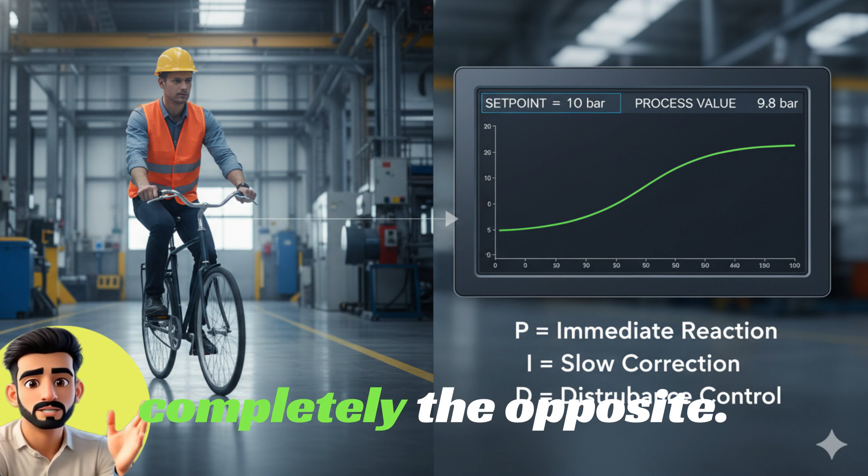Friends, as soon as people hear the name PID, they get scared. It seems like a very complex mathematical formula, which only software engineers or high level programmers can understand. But the reality is completely the opposite. PID is a natural thing, a behavior that we follow in our daily life without thinking.

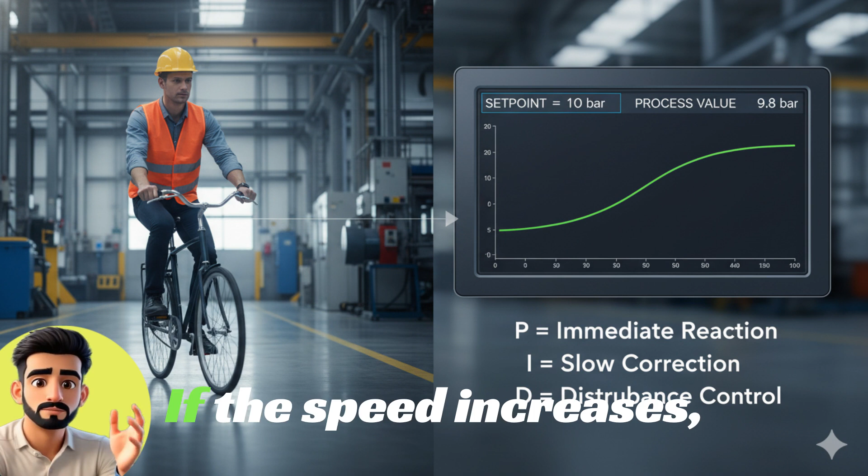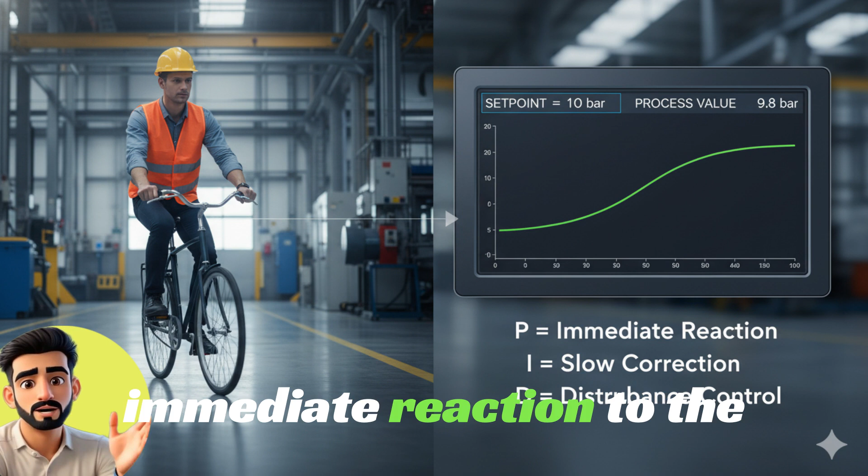Think you are riding a bicycle. If the bicycle tilts slightly to the left, you automatically lean to the right. If the speed drops, you pedal faster. If the speed increases, you slow down the pedal. These simple reactions are the foundation of PID. Proportional means giving an immediate reaction to the system. You see an error and immediately make a correction.

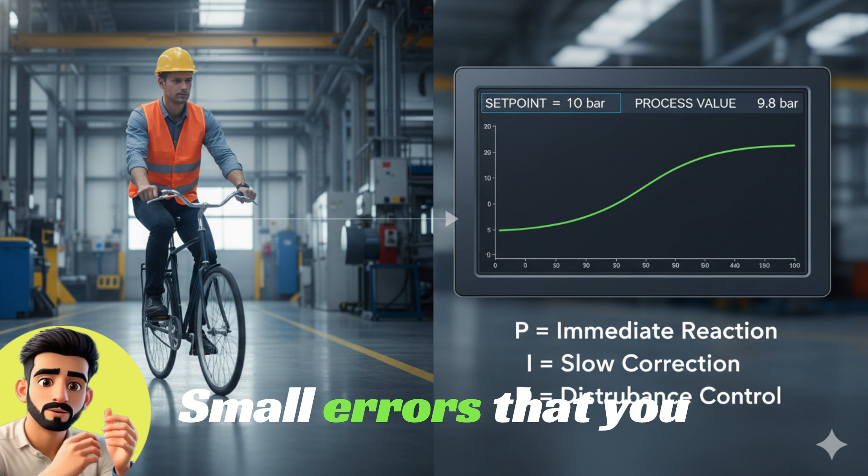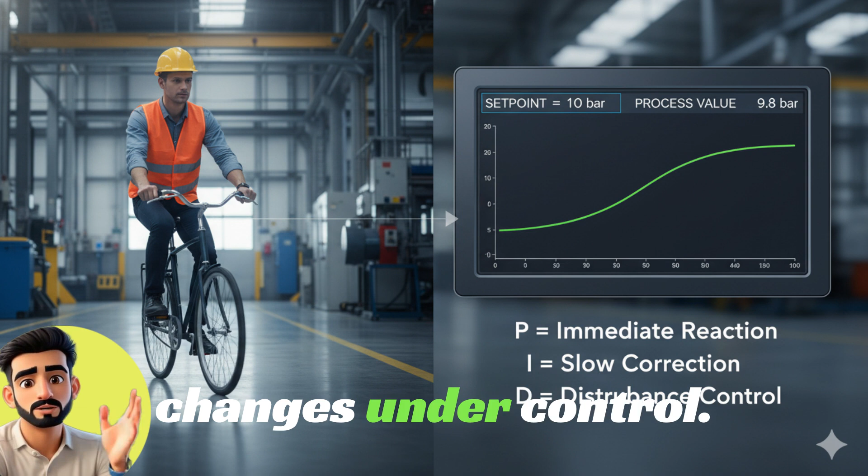Integral means gradually eliminating small mistakes, small errors that you don't notice. The integral keeps fixing them over time until the process settles cleanly. Derivative means keeping sudden changes under control. Just like when a quick jerk comes to the handle of a cycle, you smoothly absorb that jolt and keep the balance stable.

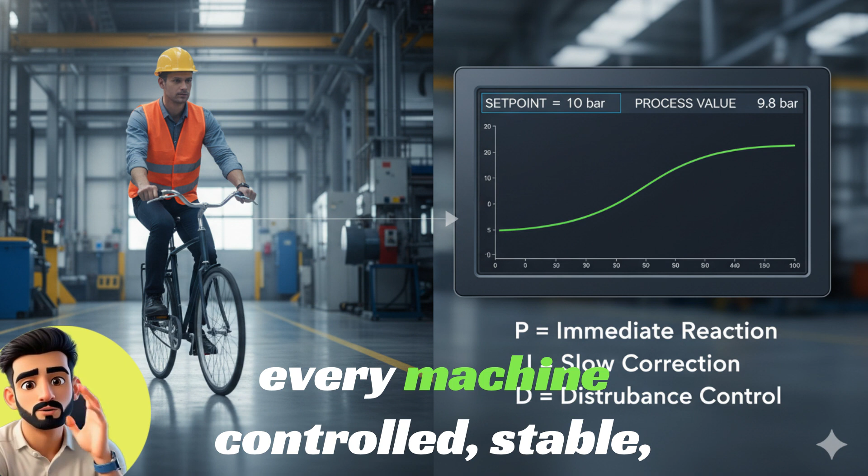These three actions, proportional, integral, and derivative, together make the motor, pump, fan, and every machine controlled, stable, and reliable. In this episode, we will make these three concepts so simple that after hearing them once, you will never forget them in life.

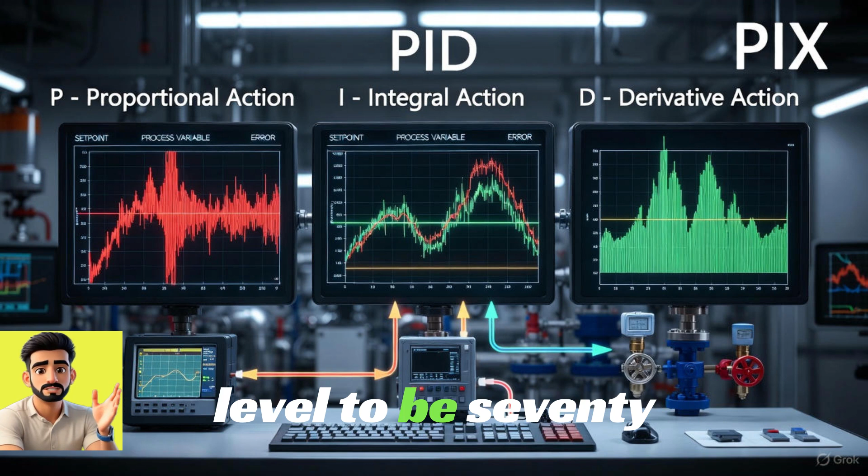The simplest, most straightforward, and fundamental principle to understand PID is every industrial system has a set point. Sometimes we want the pressure to be 10 bar, sometimes the tank level to be 70%, sometimes the flow to be 200 cubic meters per hour. This is our target. Now, the actual reading of the system, which we call the process variable, is never perfect. Sometimes it is a little less, sometimes a little more, sometimes it remains stable, sometimes it gets disturbed.

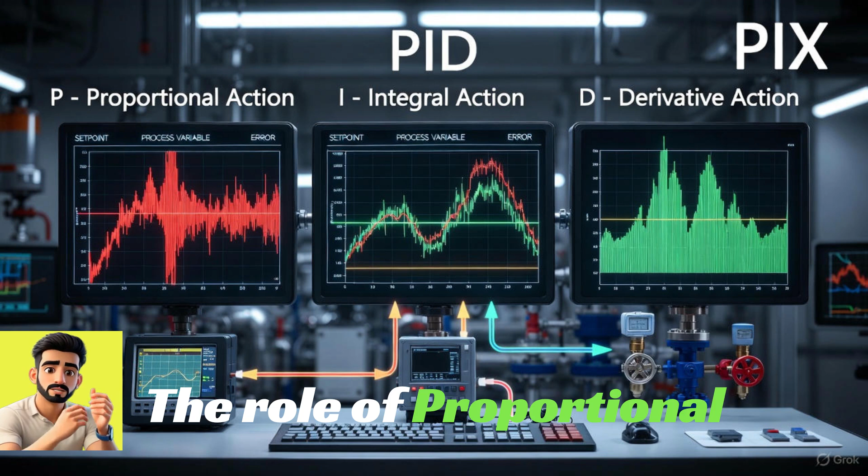The difference between these two is called the error, and the entire philosophy of PID revolves around just one thing: to bring the error to zero. That's it. The role of proportional is to look at the error and respond immediately. Fast response, quick correction. The role of integral is to slowly eliminate small continuous errors, errors that are not visible. By integrating over time, continuously push the system gently until the process settles exactly at the target.

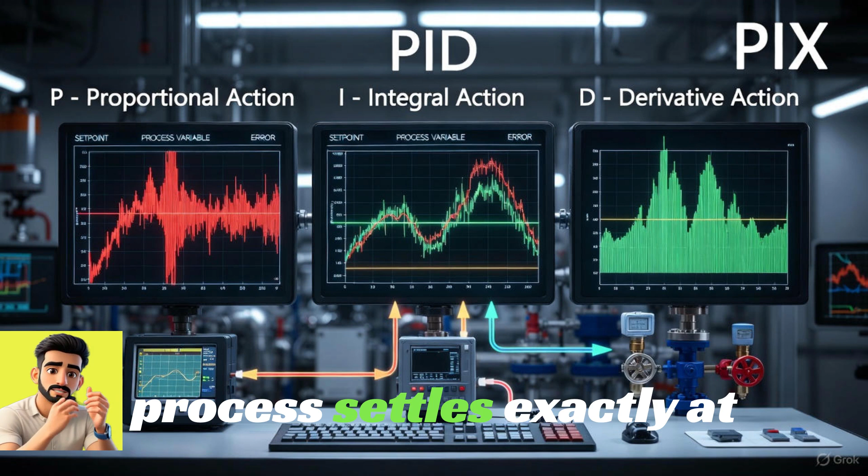The role of derivative is smoothing sudden changes. If any disturbance occurs, there is a quick jump in the pipeline, or the load changes suddenly, the derivative calms the system down and prevents unnecessary rapid changes. If you understand these three roles, proportional fast correction, integral steady correction, and derivative smooth correction, then understanding PID becomes incredibly easy. This is the very foundation upon which the entire industrial tuning is built.

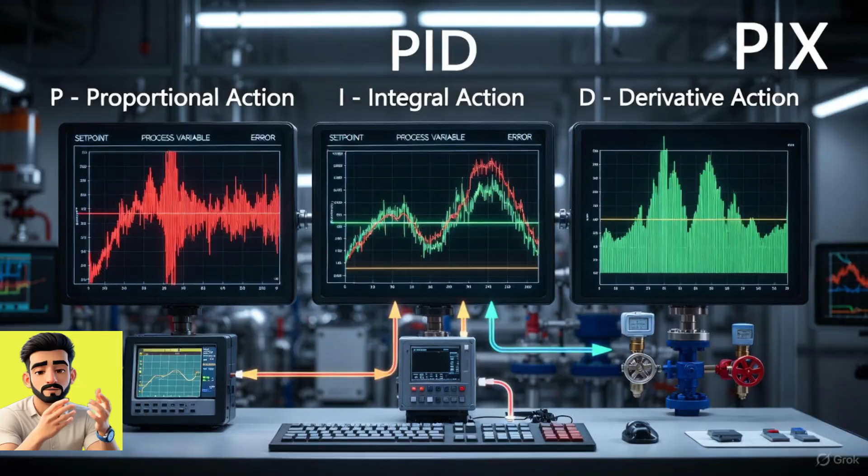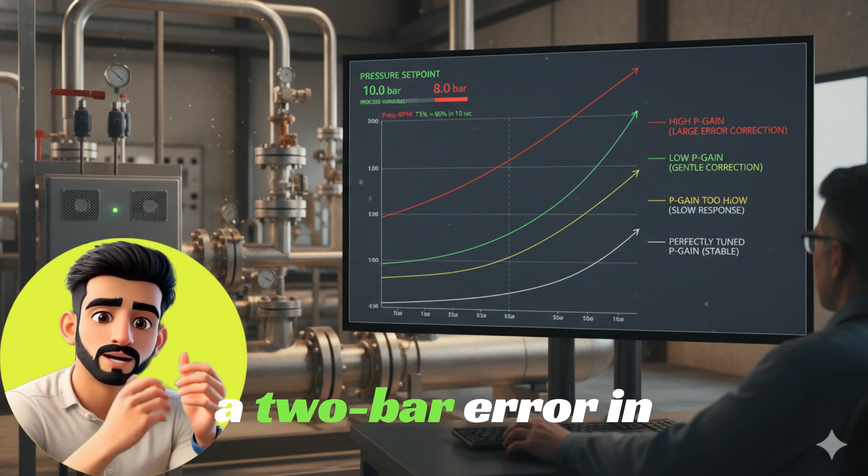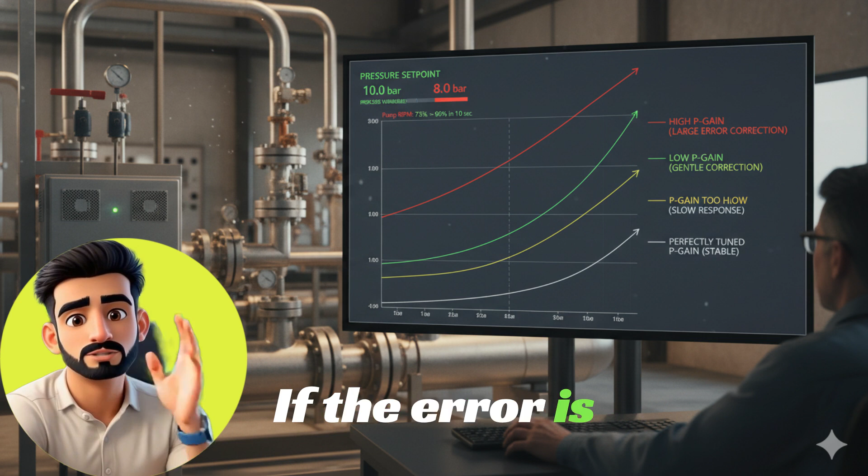Now let's talk about proportional gain, which is the heart of PID. The system's core reaction starts from here. Imagine your pump pressure should be at 10 bar, but currently it's only at 8 bar. That means there is a 2 bar error in the system. Proportional gain gives the system a signal that the larger the error, the stronger the correction needed. If the error is small, the correction remains gentle.

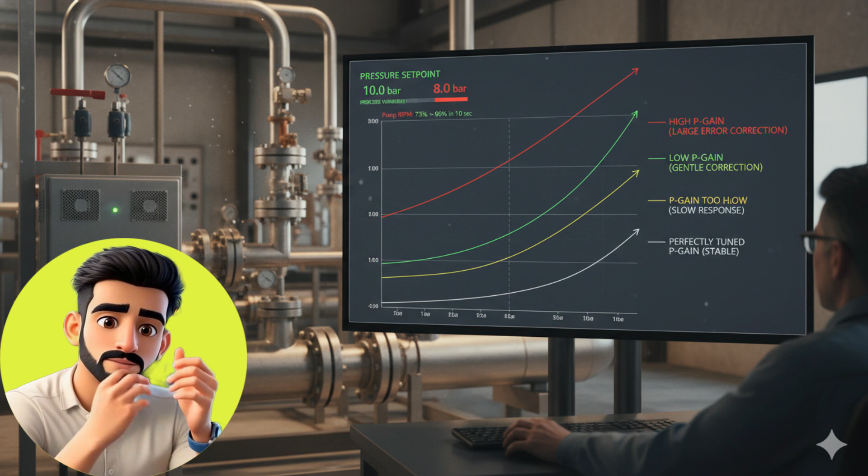If the error is large, it pushes the drive motor more to quickly bring the process close to the set point. P gain makes the system fast. The machine feels responsive. The operator thinks the process is reacting smartly. However, proportional gain is a double-sided tool.

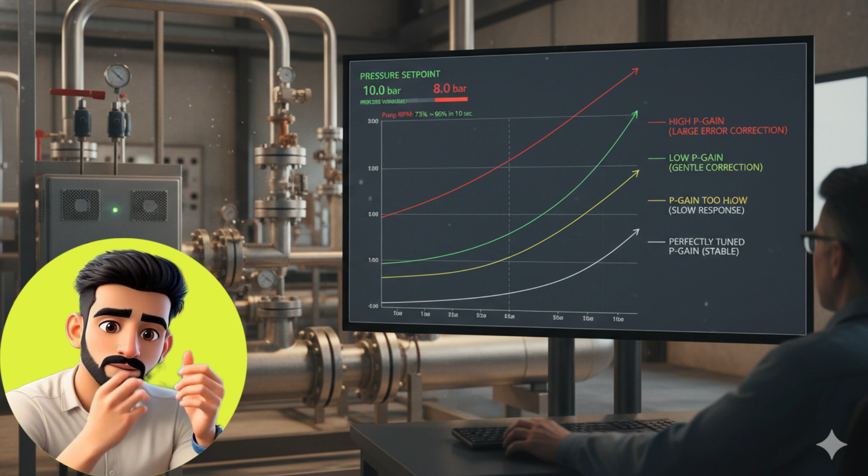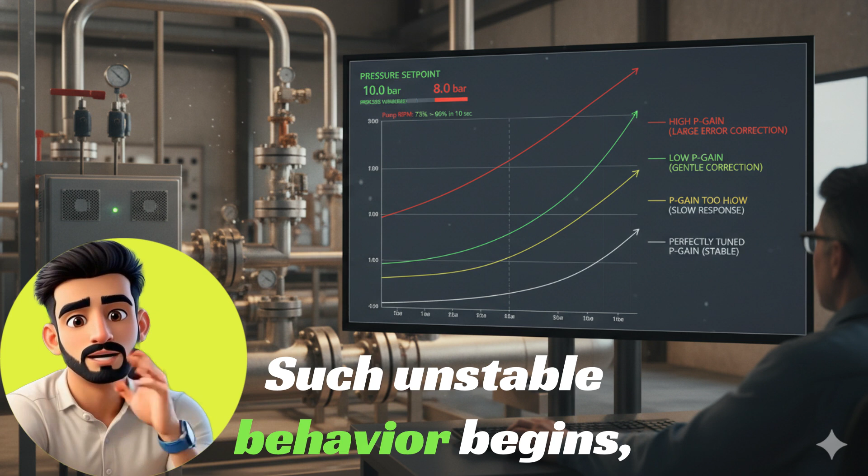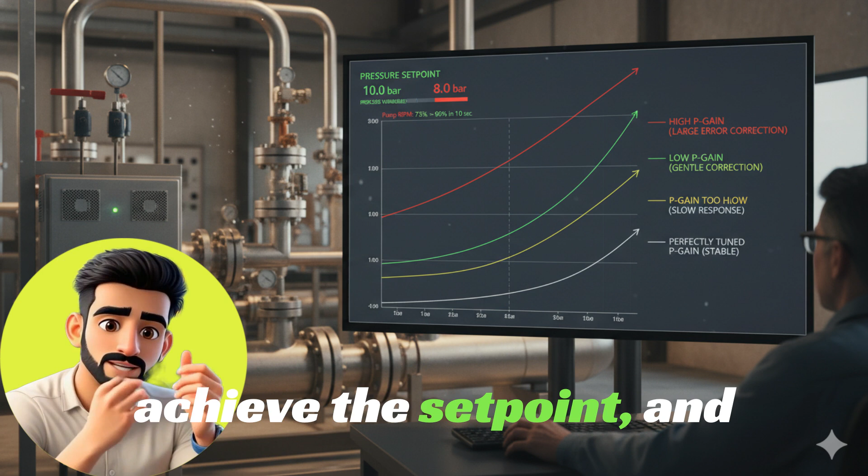If P is too high, the system goes into continuous oscillation. The pump fluctuates slightly up and down, like 9.8, then 10.2, then 9.9. Such unstable behavior begins, which is risky for the plant. If P is too low, the system becomes lazy. Response becomes slow. It takes time to achieve the set point, and the plant feels sluggish.

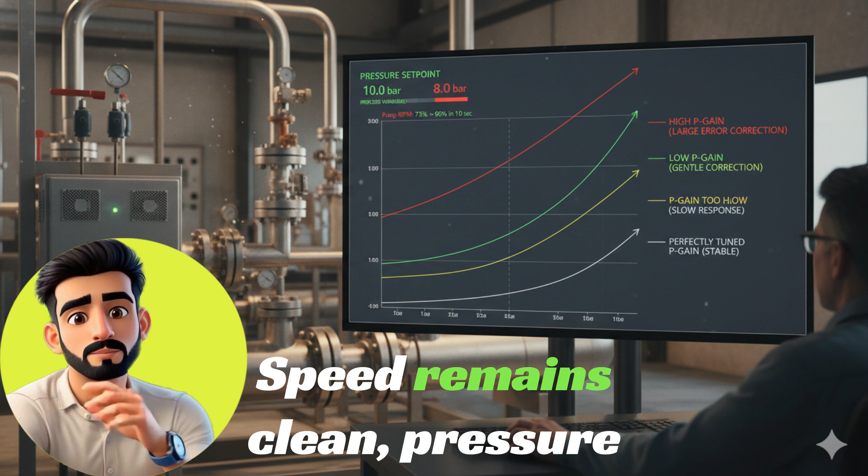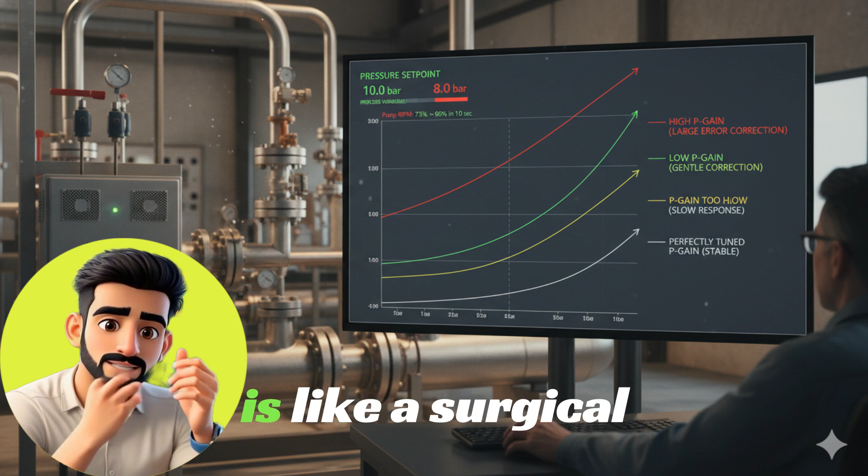But when the proportional gain is properly tuned, the system starts running butter smooth. Speed remains clean, pressure stays stable, and the overall performance of the machine gives a professional grade feel. That's why proportional gain is like a surgical tool in the engineer's hand.

The precision with which you tune P determines the stability of the entire process.

Integral gain is the most misunderstood part of PID. People often think that integral is unnecessary or that the system will work fine without integral, but the truth is something else. Proportional action alone can never eliminate steady state error. You may reach the set point, but you won't be able to stay there. The system will drift up and down, just keep fluctuating.

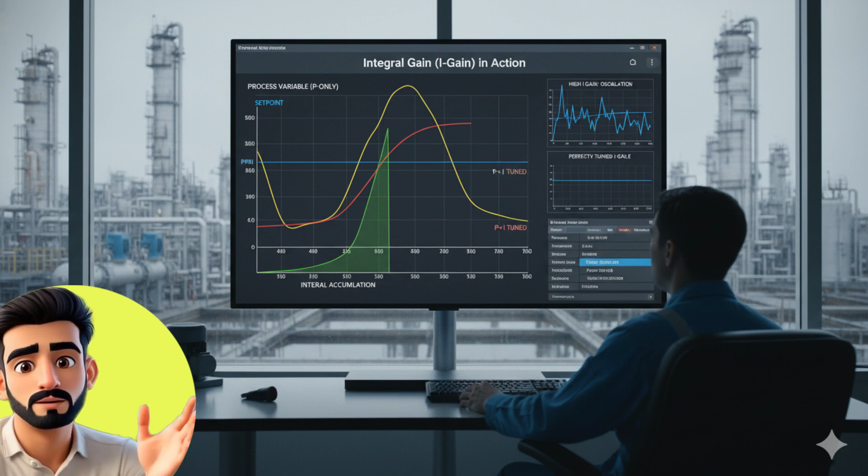This is where integral shows its real magic. Integral collects the error over time and gradually provides correction. Just like a person solves a problem with patience, slow, steady, thoughtful. If the system is even slightly below the set point or slightly above, the integral notices that small error. It accumulates that error and gently pushes the system until the process settles exactly at the target.

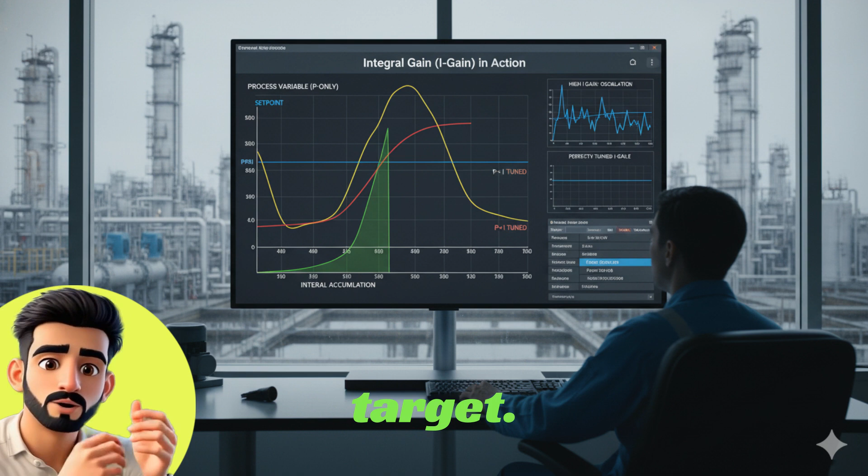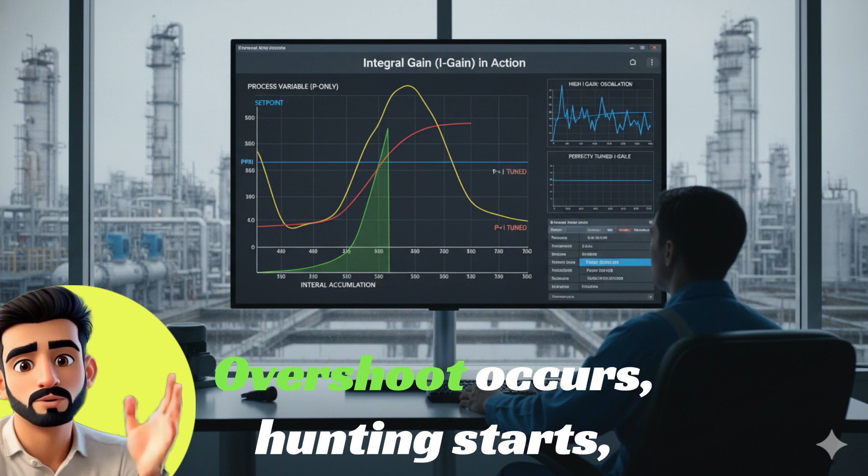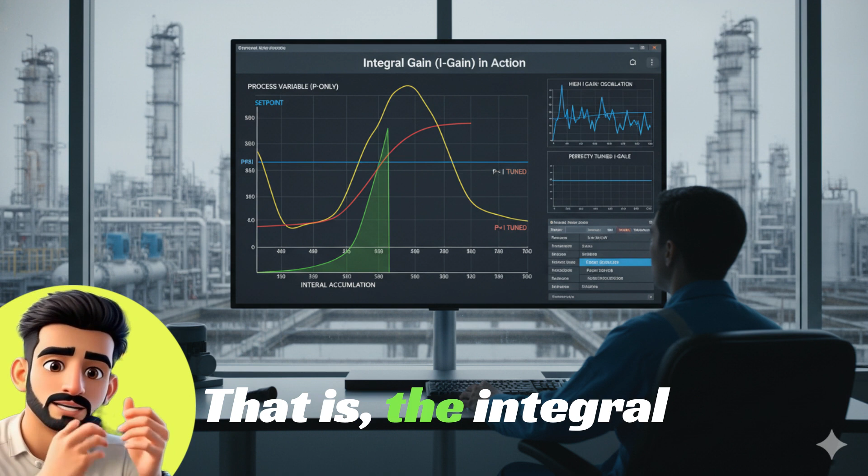But integral also has a dark side. If the integral gain becomes too high, the system becomes heavily unstable. Overshoot occurs, hunting starts, surges happen in pressure lines, and the machine begins to behave jumpily. That is, the integral gain is both very useful and dangerous. Proper tuning is the real magic that unlocks this. When the I gain is balanced, the system's behavior becomes smooth, steady, and industry-grade stable.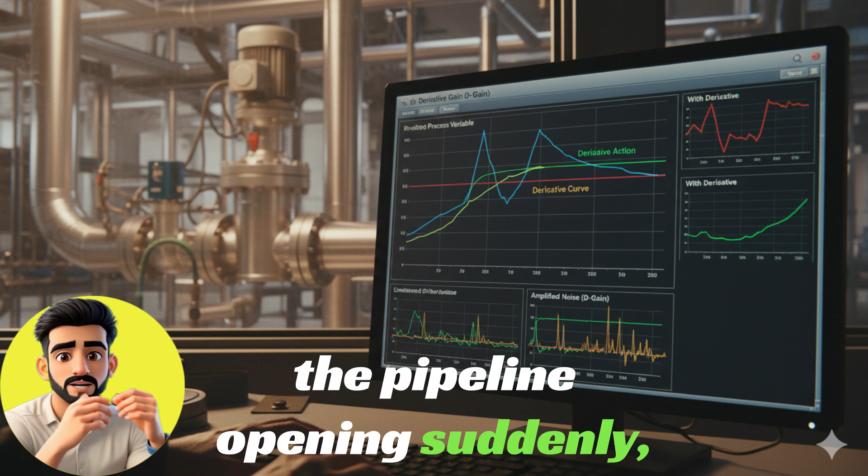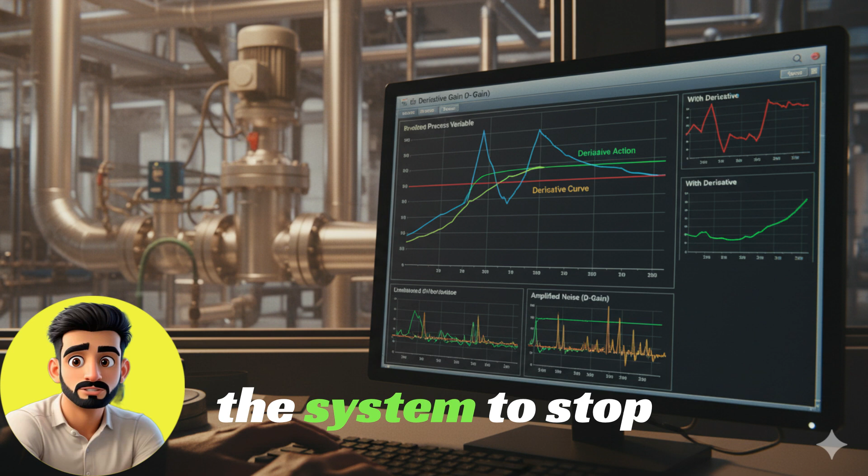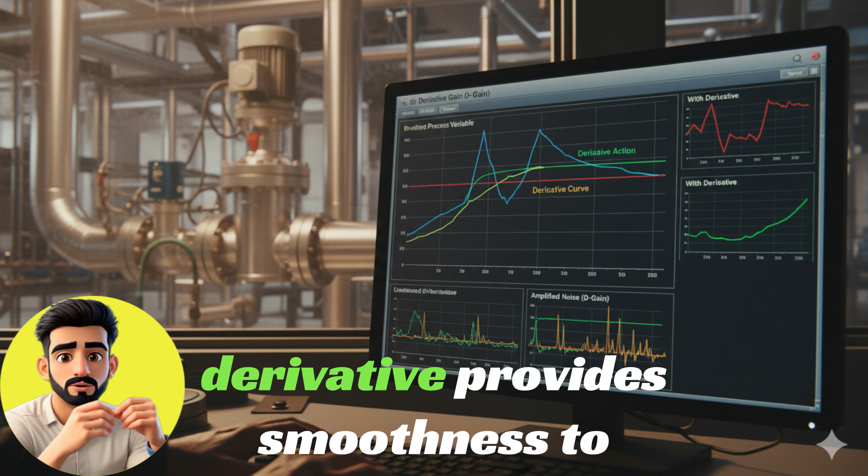Derivative gain. In PID it is the shock absorber of the system. When the system receives any sudden disturbance, such as a valve in the pipeline opening suddenly or inflow into the tank increasing abruptly, the derivative reacts first. D-gain detects that sudden change and tells the system, "Stop, do not react so quickly, understand the situation first." In other words, the derivative provides smoothness to the system, calms down its impulsive response, and keeps sudden jumps under control.

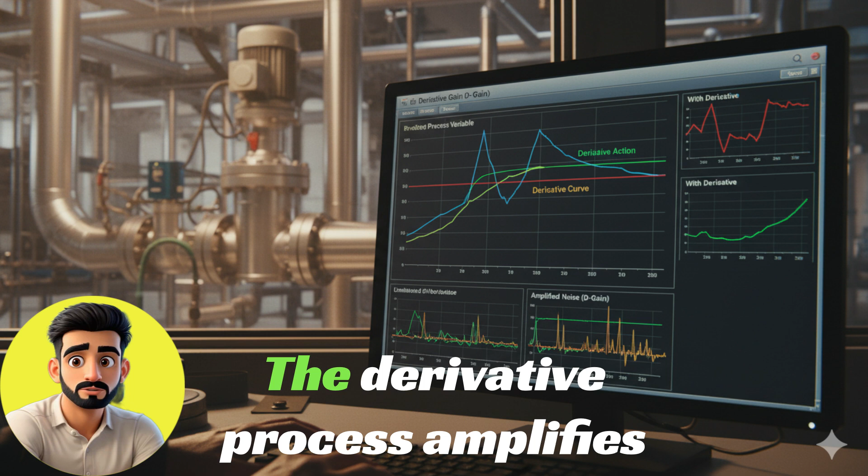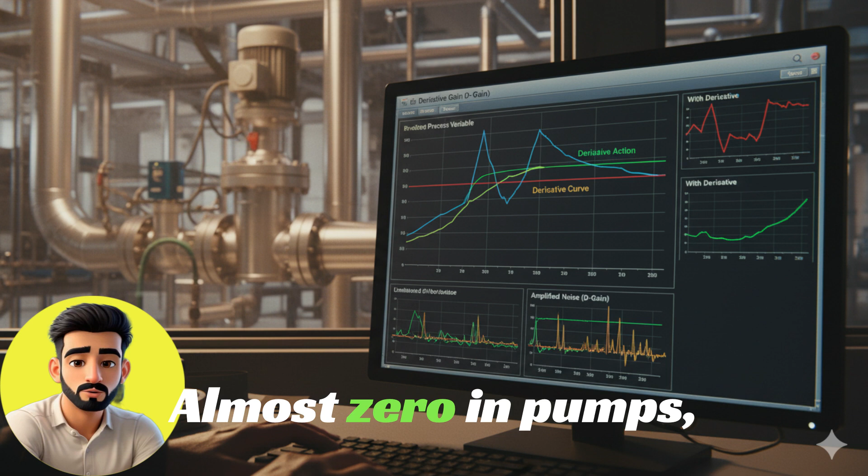But D has a major limitation. The derivative process amplifies noise. If there is sensor noise, pipeline vibration, or the signal is not clean, then D amplifies these small movements. The system can become unnecessarily jumpy. That is why in industry, the use of the derivative is very limited. Almost zero in pumps, almost zero in fans, and completely zero in level control. In these processes, D creates more problems and provides fewer benefits.

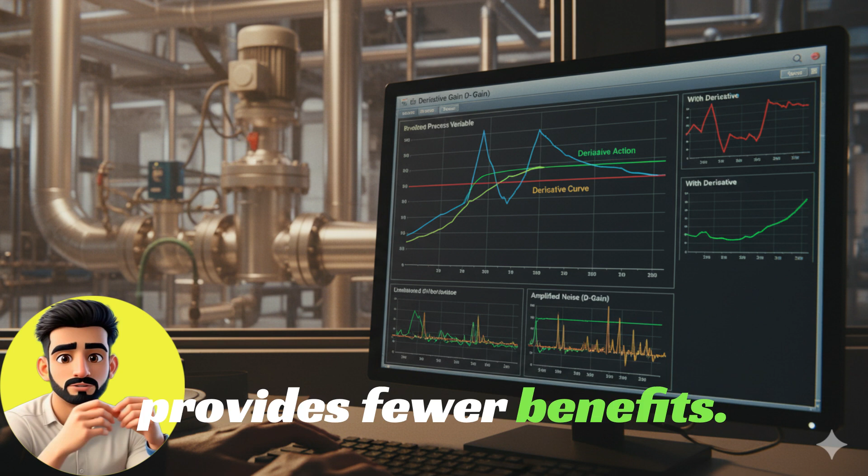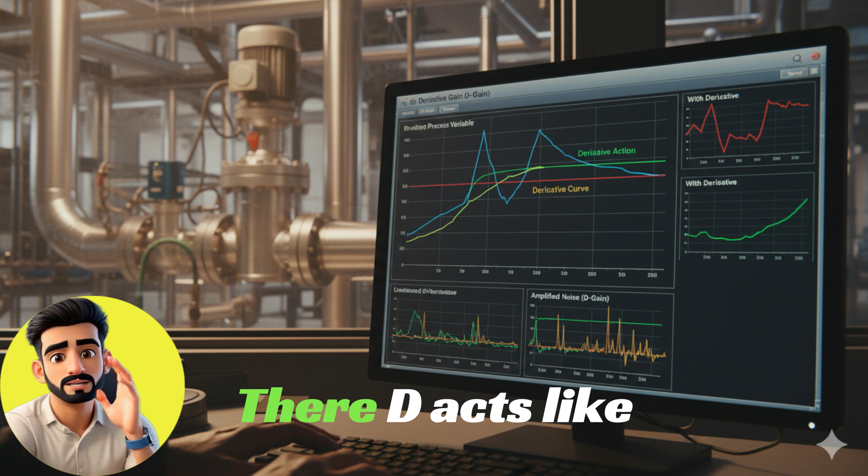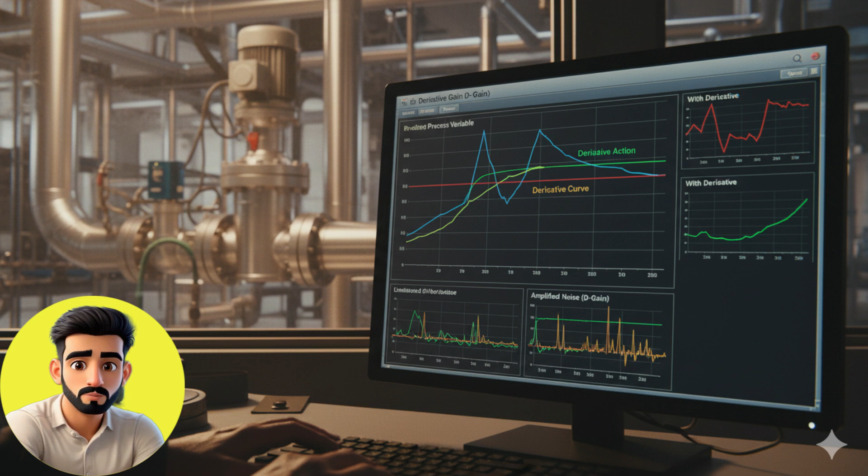But where precision matters, such as high accuracy speed control, position control, robotics, pick-and-place systems, CNC machines, there, the derivative is very valuable. There, D acts like a strong stabilizer, polishes sharp responses, and makes motion ultra-smooth. Understanding the derivative is an important milestone in PID tuning. Where to use it, where to avoid it. This difference creates a gap between a normal tuning engineer and a control systems expert.

The control structure inside VSD is completely layered. This design is not the result of an accident, but the outcome of decades of research and industrial experience. At the very inside is the torque loop. This is the fastest loop of the system. The torque loop reacts in microseconds. It instantly adjusts the motor's current and ensures that the motor receives the required torque without any delay. Such a level of control is so fast that the human eye can never notice.

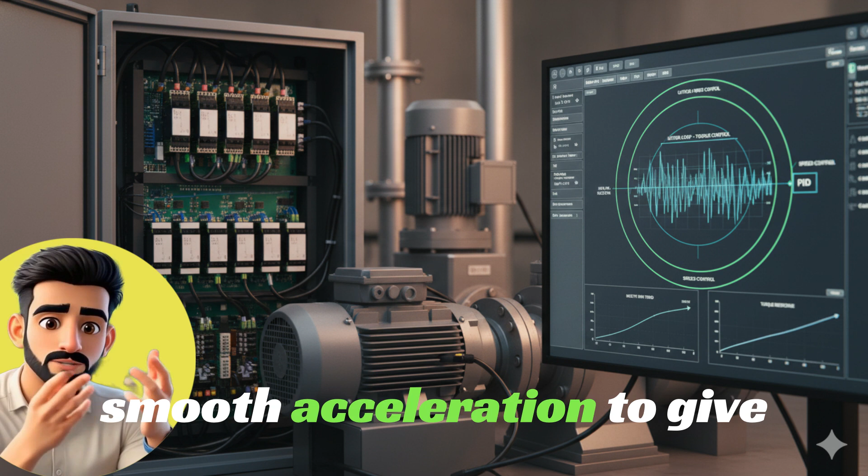Above this torque loop is the speed loop. The speed loop is relatively slow, but it is the actual decision maker of the system. It decides how fast the motor should run, how much torque to demand when the load increases, and how much smooth acceleration to give to the machine. The PID controller mostly works in the speed loop. It creates a balance between speed and torque so that the machine is neither jumpy nor feels sluggish.

The real beauty of this layered design is that the system is both highly responsive and highly stable. The torque loop provides instant reaction. The speed loop offers smooth correction, and together they give the machine a professional industrial grade behavior. If you understand this concept, the torque loop is inside, the speed loop is outside, then you have understood the true core of industrial motor control. This is the foundation upon which all modern drives are based.

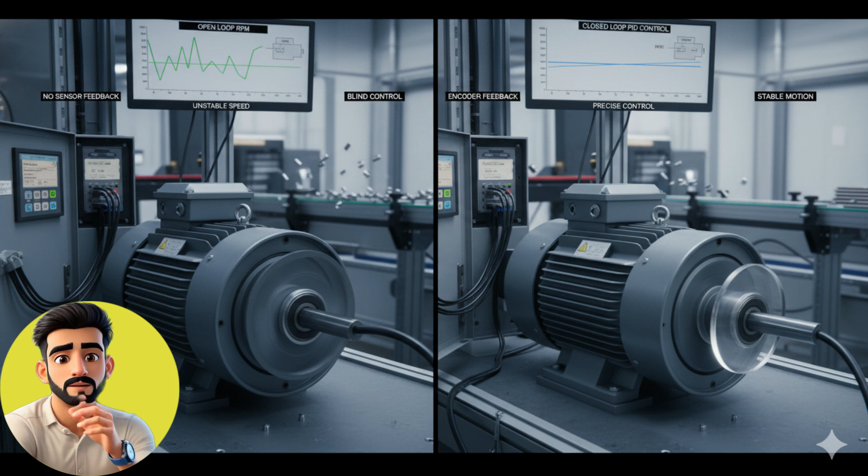Imagine you are driving a car, but there is no dashboard. You don't know the speed, you have no idea of acceleration, and you are just driving by feel. This is open loop control. The system is running, but without any real feedback. Now imagine you have a complete dashboard. There is a speedometer, an odometer, and cruise control is also active. You can maintain the car's speed exactly. If the road slope changes, if the load changes, the car still continues to run smoothly because the system knows in real time what the speed is and how much correction to give.

This is closed loop PID with encoder. The encoder continuously provides feedback to the drive. What is the real speed of the motor? Is the motor slowing down or speeding up? Is the load increasing or decreasing? All this information is shared by the encoder in real time. Because of this feedback, the closed loop system remains stable, reacts quickly, and keeps these changes under perfect control. The machine's behavior with closed loop PID becomes industry grade reliable.

No hunting, no random speed jumps, no unnecessary vibrations. Just smooth, controlled, and highly precise performance. This is the difference that makes a normal drive a professional engineering system.

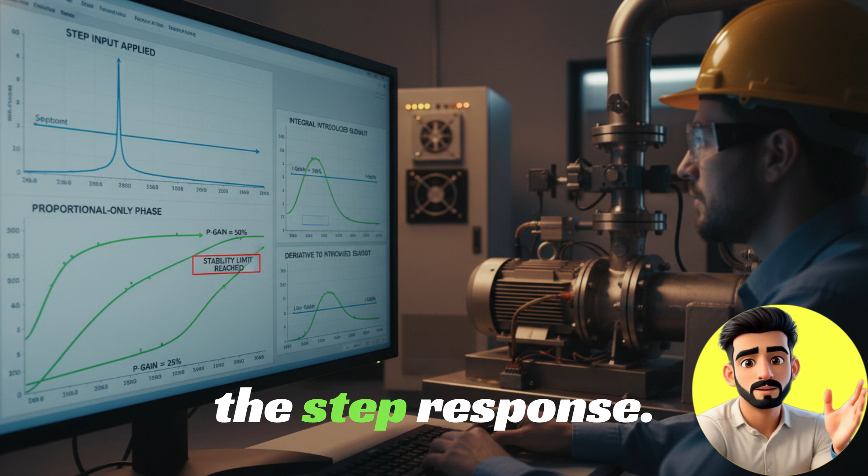Today, we will see step by step how to tune correctly and how to convert the plant from unstable to smooth, stable, and professional behavior. The cleanest, most scientific, and most reliable tuning method is the step response. In this approach, there is no guesswork, no trial and error, only controlled observations.

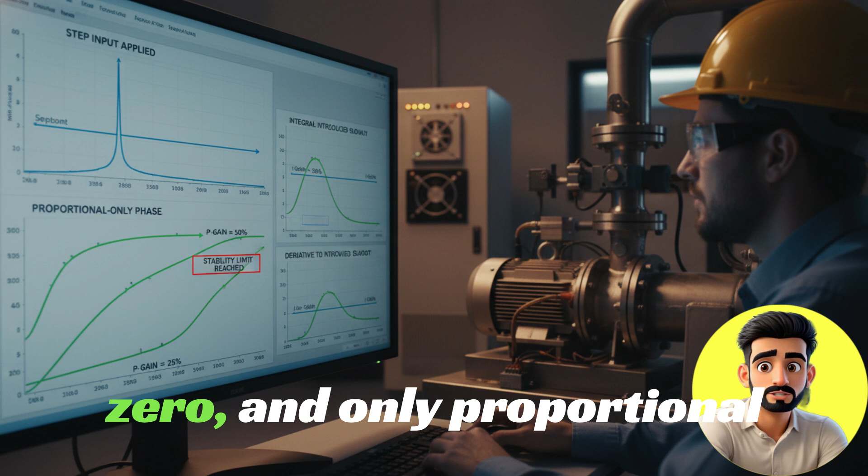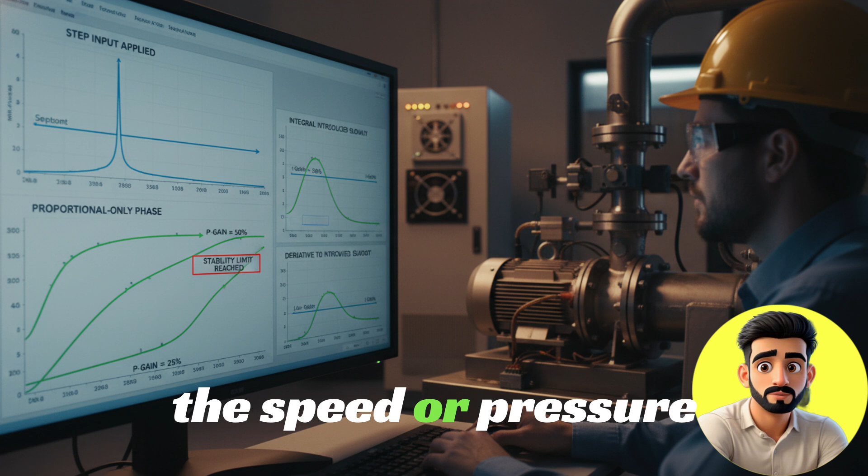The process is simple. First, the integral is set to 0. The derivative is set to 0, and only proportional action is active. Then, the proportional gain is gradually increased. The machine's response is observed. As long as the system remains stable, P is increased little by little. And as soon as oscillation begins in the system, as soon as the speed or pressure starts to jump back and forth, understand that the proportional gain has reached its limit. This is where the work begins.

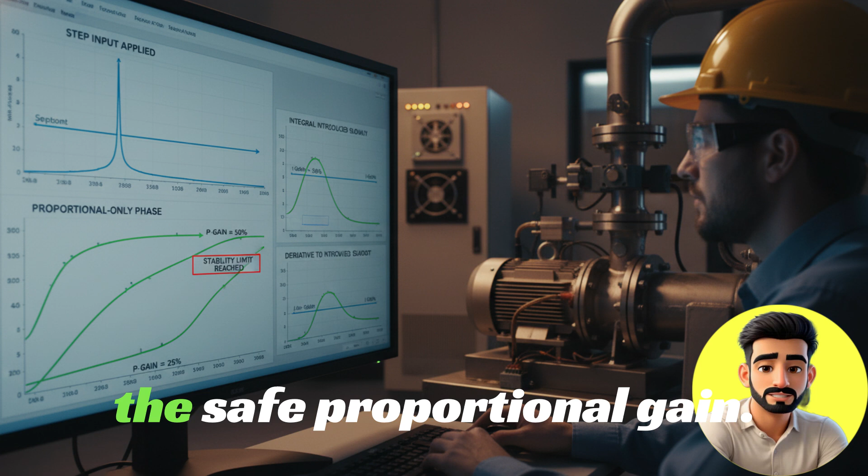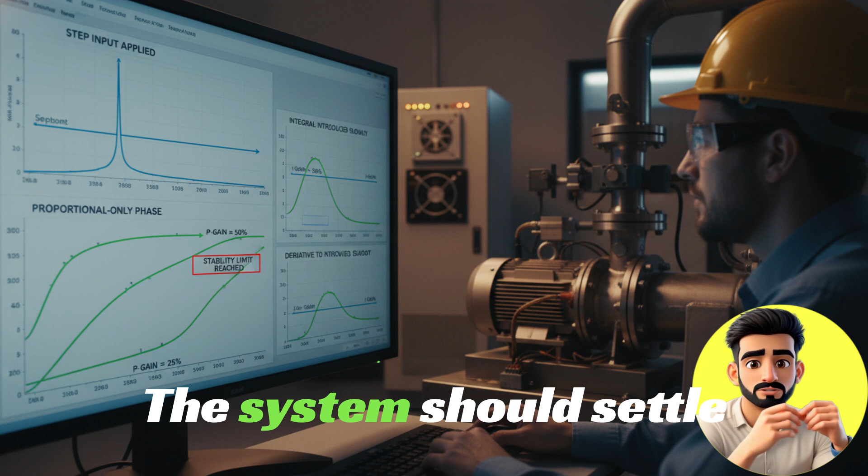The oscillation started at a certain value, and half or slightly more than that, approximately 50 to 55%, is the safe proportional gain. After this, the integral is gradually introduced, just enough to make the steady state error zero. The system should settle cleanly at its set point. Never set the integral too fast, otherwise the system will become jumpy.

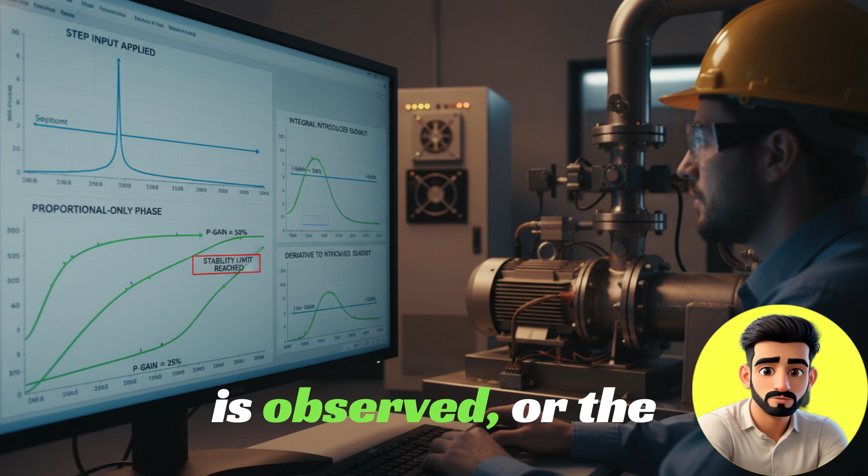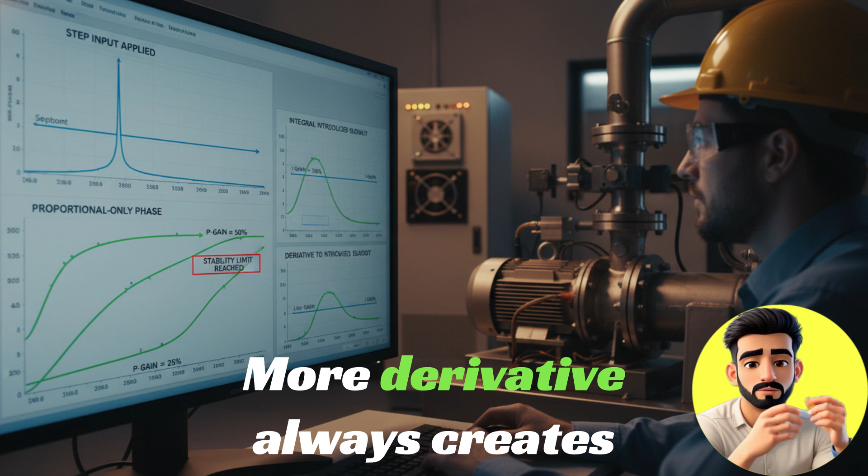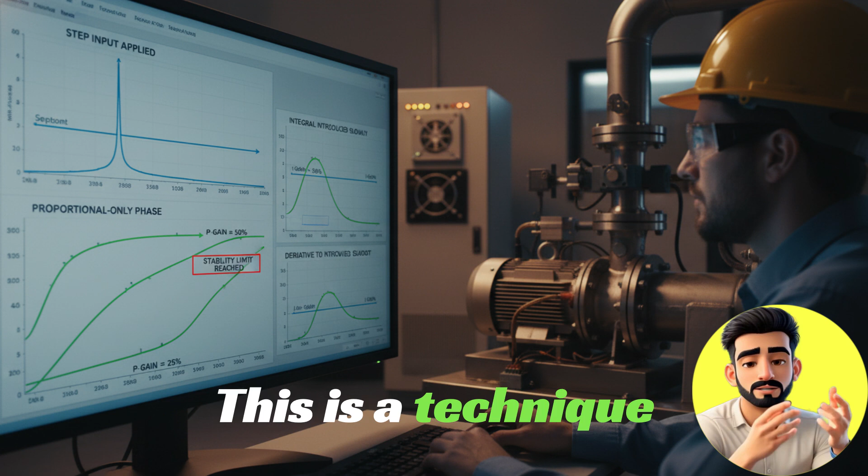And if overshoot is still observed or the system does not settle back after the peak, then the derivative is used a little. Only then, when it is actually necessary. More derivative always creates noise. Step response tuning is a universal method. Every OEM, every drive manufacturer uses this approach in internal testing. Whether mentioned in manuals or not, factory tuning is always based on this science. This is a technique that gives the engineer complete command over control loops.

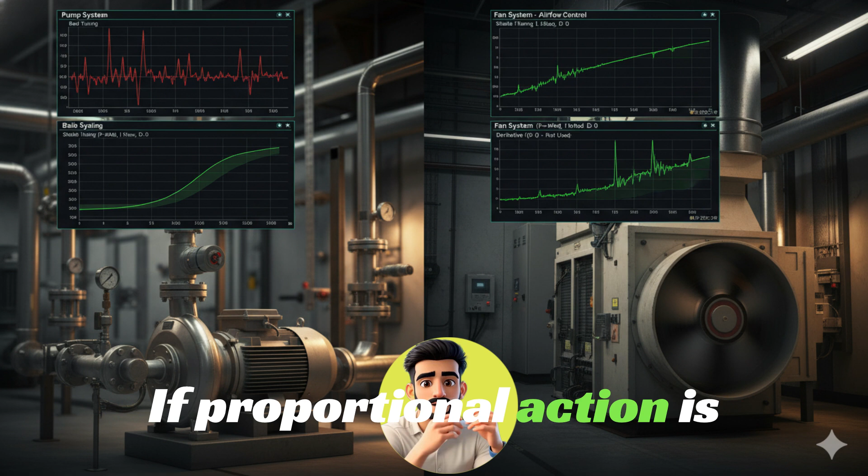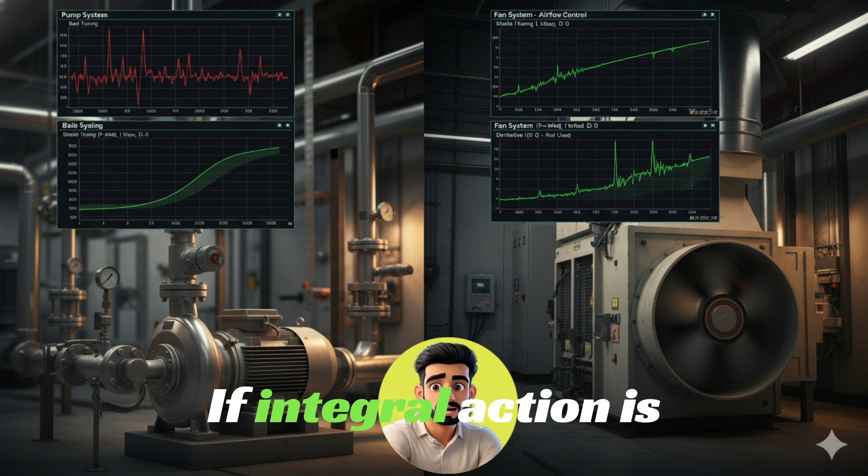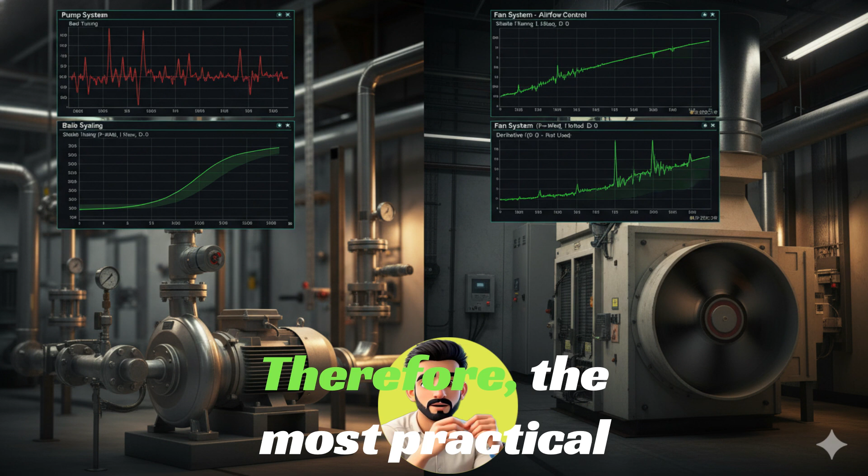The behavior of pumps is naturally soft. Flow and pressure change gradually, so pump systems do not tolerate aggressive tuning at all. If proportional action is kept high, pressure hunting starts, sometimes up, sometimes down, and the pipeline becomes completely restless. If integral action is kept fast, dangerous surges are created in the pipeline, pressure suddenly jumps, and the system starts feeling out of control. Therefore, the most practical tuning for pumps is always balanced. Medium proportional action, slow integral buildup, and zero derivative. This combination gives pumps a smooth, silent, and stable behavior.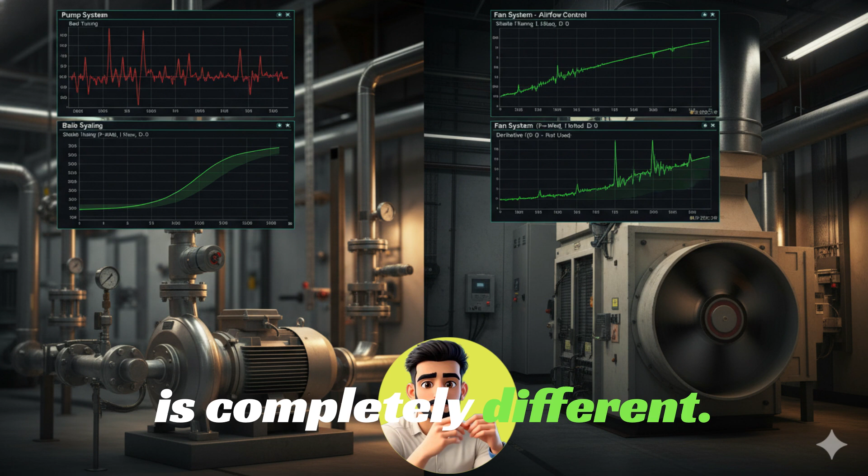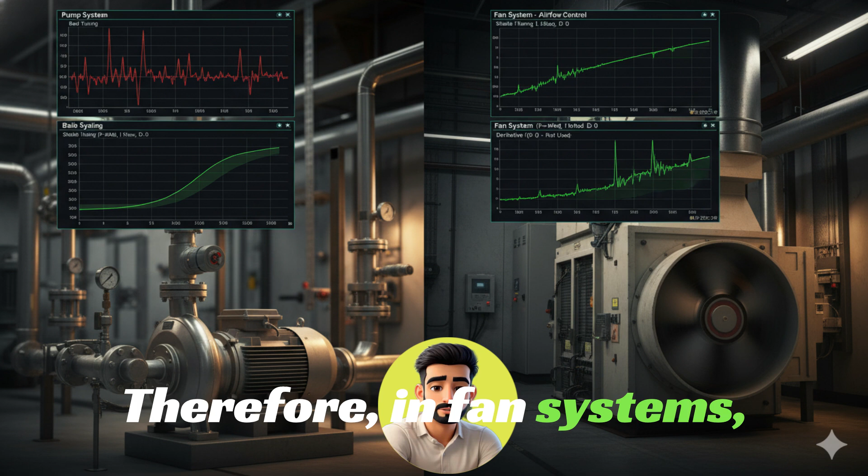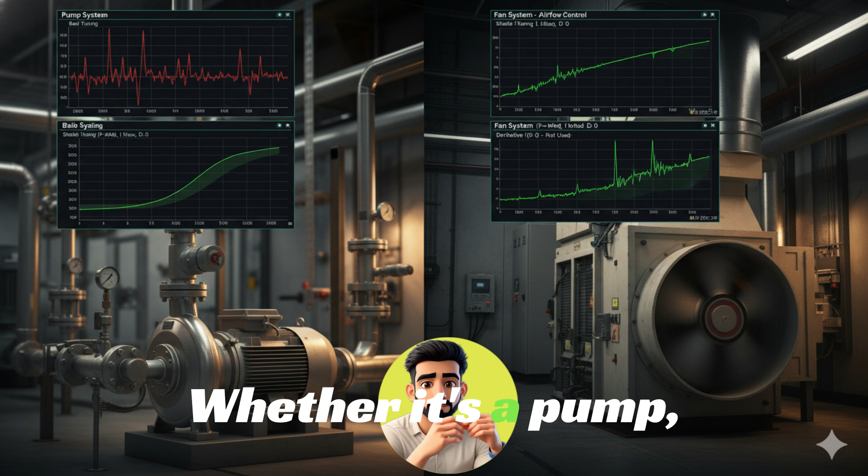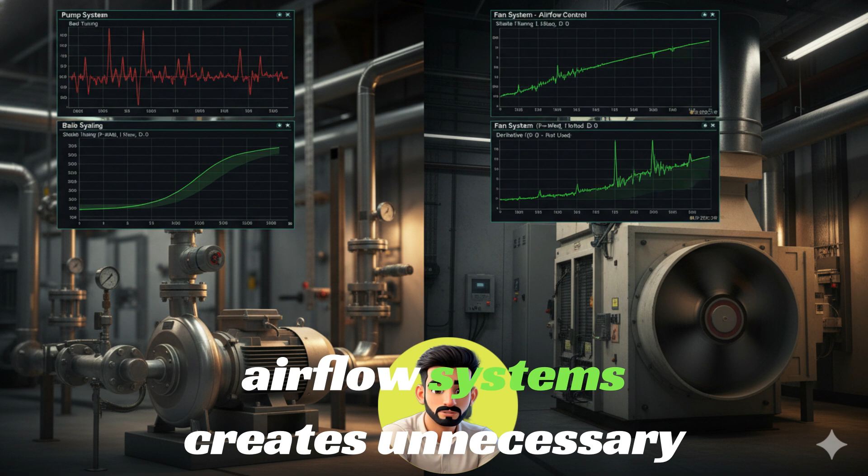The behavior of fans is completely different. Fans are fast response machines. Airflow changes instantly, and pressure also adjusts quickly. Therefore, in fan systems, integral action needs to be kept a little fast so that speed settles quickly and airflow remains stable. But one thing is common. Whether it's a pump or a fan, derivative action is almost never used in both. Derivative provides fast feedback, which in hydraulic and airflow systems creates unnecessary noise and jumps. In practical field tuning, avoiding derivative for both pumps and fans is the safest and most stable approach.

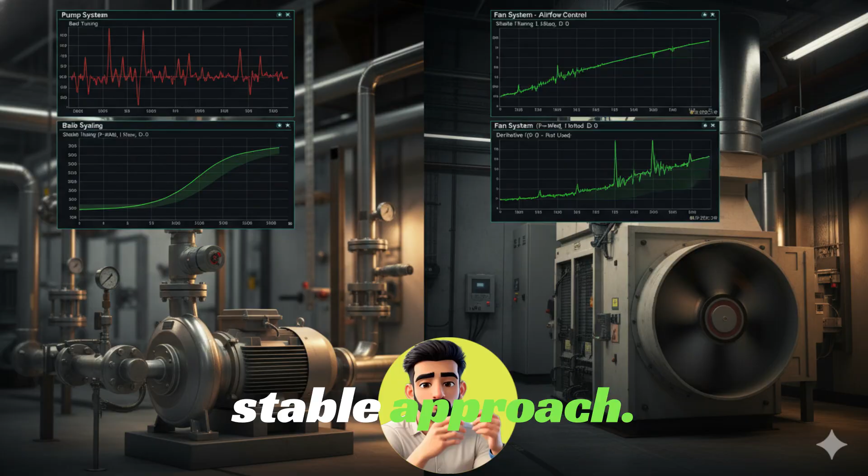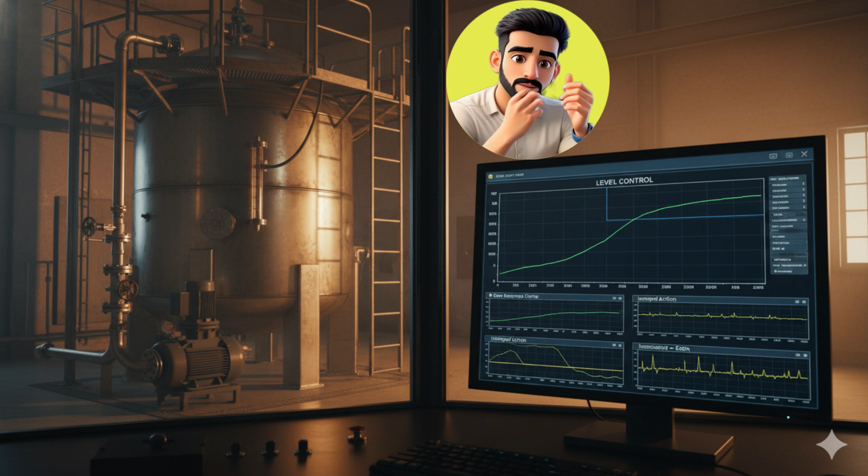Level control is my favorite topic because this process is the most delicate, the slowest, and demands the most patient behavior. The tank's level does not respond instantly. You give a signal, slow down the pump, adjust the valve. Yet it still takes time for the tank to react. That is why level loops never prefer aggressive tuning. The biggest mistake is adding derivative action. Derivative responds quickly, but the tank reacts slowly. Their speeds become mismatched. The result is that the tank continuously becomes unstable. The level never settles, and the system starts feeling even more jumpy.

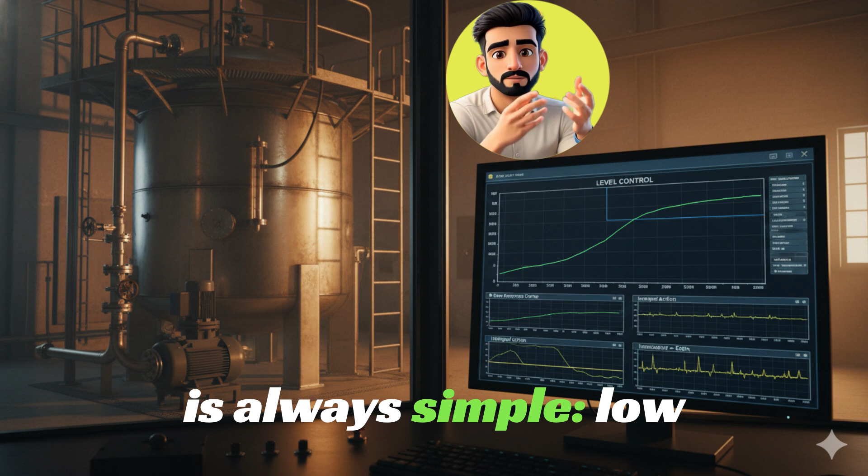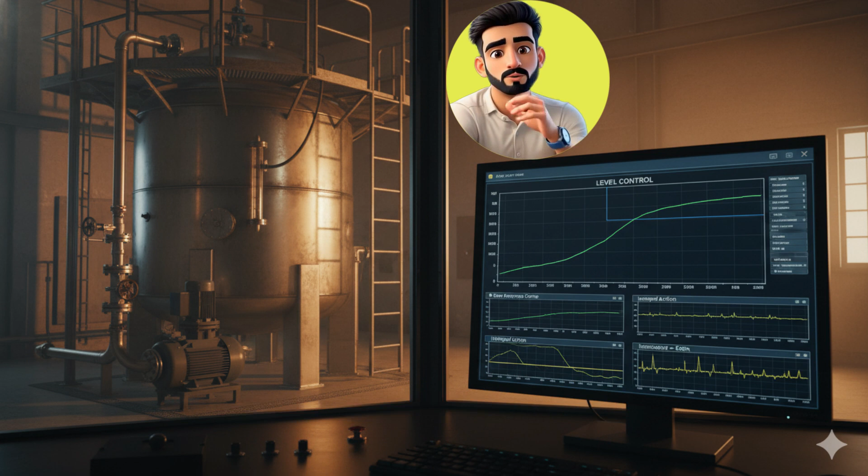That's why the golden rule of level control is always simple. Low proportional action, medium integral action, and zero derivative. This combination provides the smoothest, most predictable, and safest results for tank systems. Level control is not only a science but also a test of patience. Whoever understands this begins to view process control from a new and professional perspective.

Hunting is the most common issue in pressure control. This problem is visible everywhere in the field, and operators often think that the system is unstable. The reality is that the tuning is not balanced. When the proportional action is high and the integral action is slow, the pressure loop starts to overreact. Pressure systems are very sensitive. Even a small change can create a large effect in the pipeline. Due to this sensitivity, the system begins to hunt, sometimes up, sometimes down, and the pressure does not settle at one point. The most practical solution is always conservative tuning.

Pressure loops do not favor aggressive tuning. A medium proportional response, medium to slow integral buildup, and, if the pipeline is very long, light derivative support. This combination provides the most stable results in the real world. By tuning this way, the pressure settles smoothly.

The motor does not give unnecessary torque jumps, and the machine exhibits a completely controlled, predictable, and stable behavior. This is the tuning philosophy that gives an engineer real confidence in control loops.

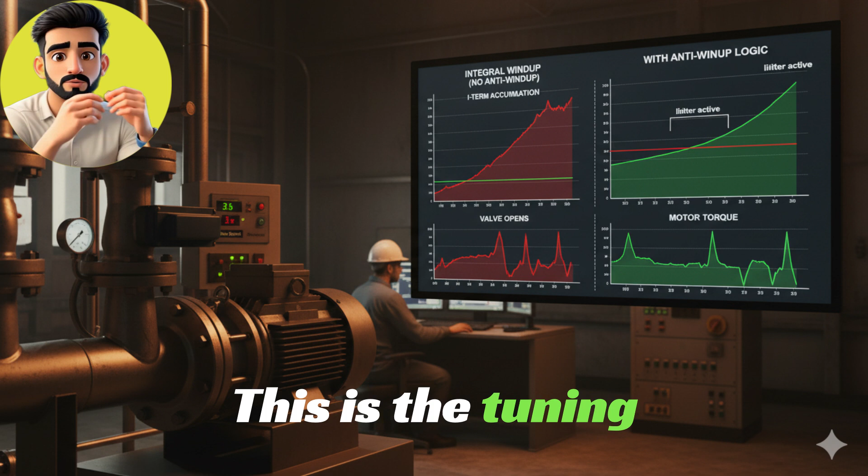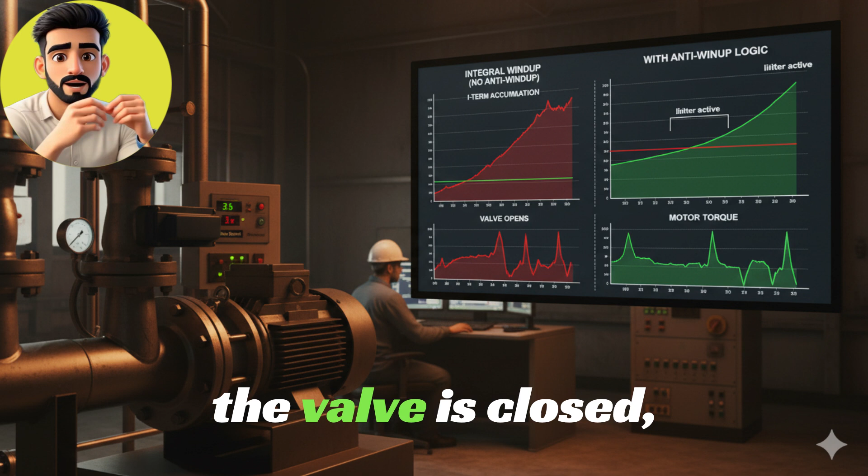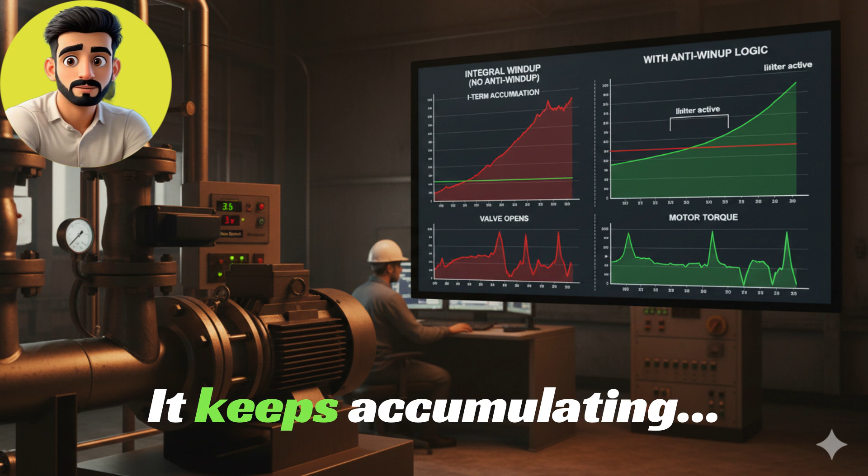Integral windup is a silent killer. This problem is very common in the field, but engineers do not understand initially where the issue is coming from. Imagine your pump is running at minimum speed, the valve is closed, and the pressure has not yet reached the set point. In this situation, the integral error gradually accumulates. It keeps accumulating, and an invisible pressure builds up inside the system.

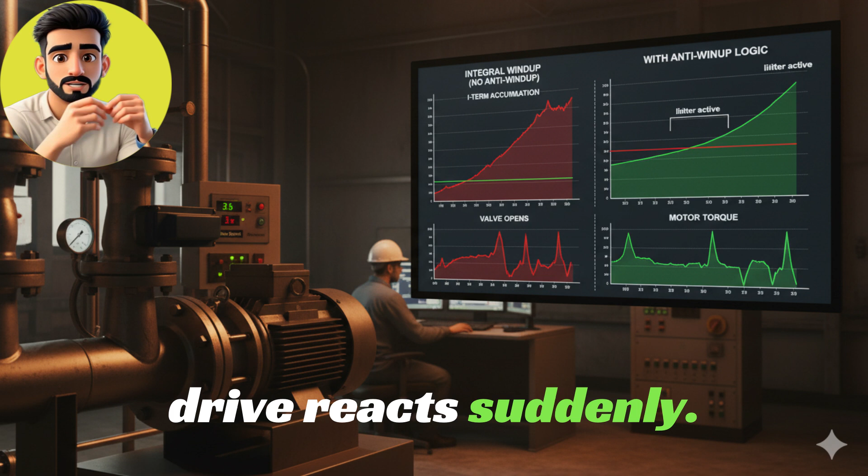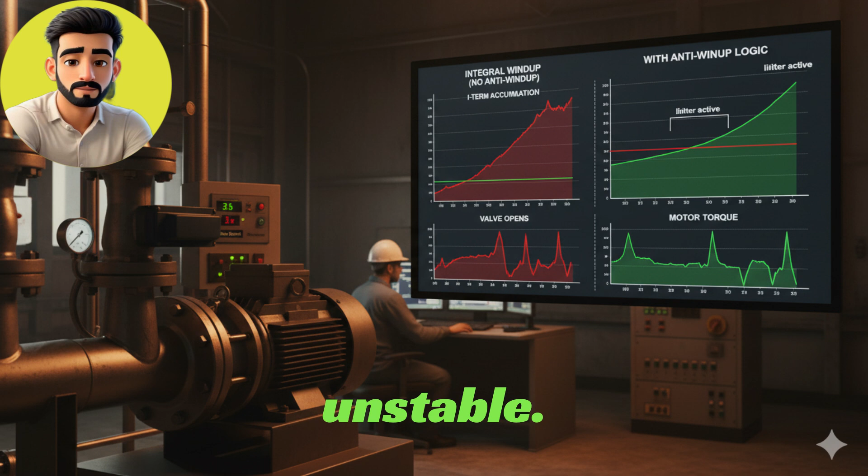Then, as soon as the valve opens, the drive reacts suddenly. Motor torque suddenly becomes high, the pressure spikes inside the pipeline, and the entire system feels unstable. The operator only sees that the machine is jumping, but the real root cause is the integral error windup. This is called integral windup, a slow buildup, which later explodes in the form of a sudden overshoot.

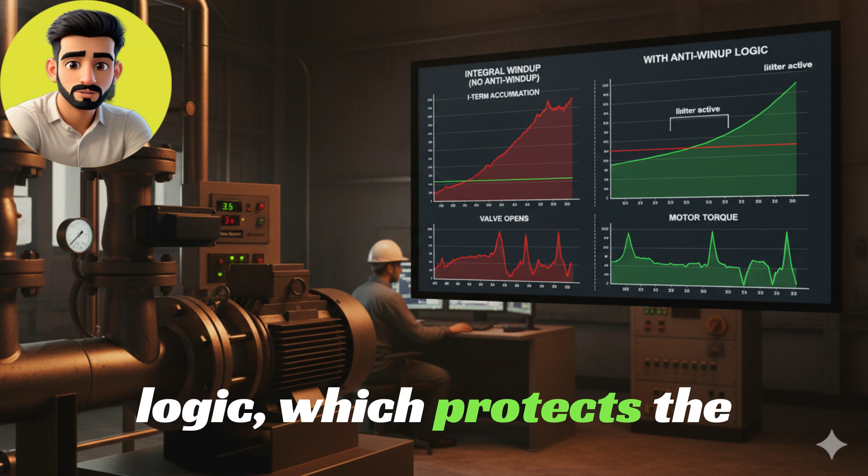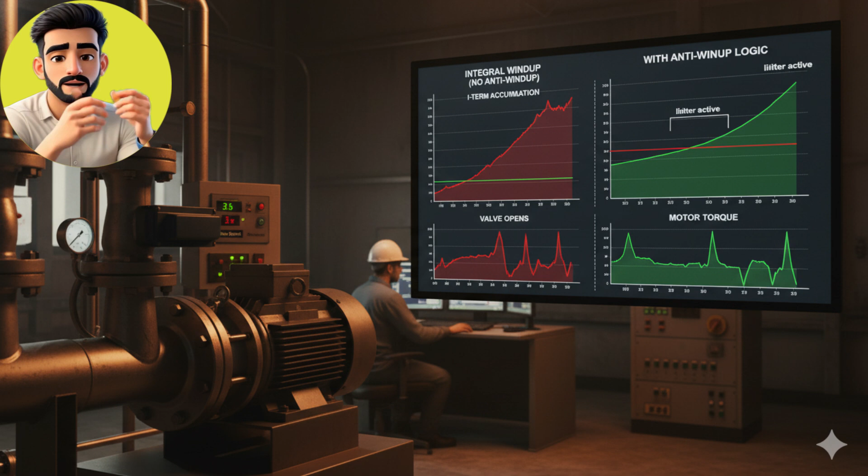Modern VSDs have anti-windup logic, which protects the system, limits the error when the valve closes, and keeps the process in balance. But this protection works only when the settings are kept perfectly correct and tuning is done thoughtfully. Understanding this concept elevates an engineer's control system knowledge to a higher level.

Incorrect PID tuning is not a small issue. In the field, we have repeatedly observed that when tuning is not correct, pumps start surging, pipelines vibrate, motors begin to heat up, noise is generated, cavitation starts, and the levels in tanks overflow. Compressors also begin to run in unstable mode, and the entire machine behavior becomes unpredictable. All these problems are caused by the same reason: incorrect PID tuning.

When an engineer properly tunes the PID, the plant's behavior literally transforms. Machines run smoothly, speed remains stable, and the process feels completely controlled. This is the skill that turns an ordinary engineer into a high-value professional engineer.

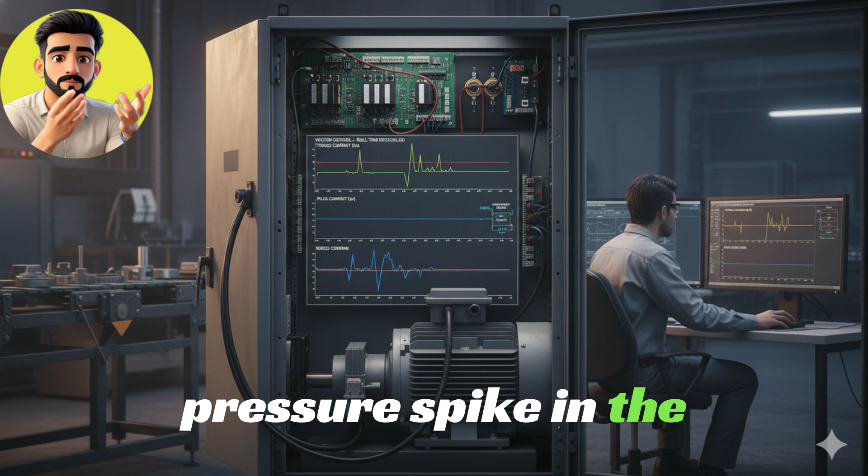In vector control, the motor's torque and flux are handled separately. This means that the drive has full authority over the motor. The drive decides in real time how much torque to deliver and how much magnetic strength to maintain. When torque and flux become independent, the motor's speed control becomes very powerful. If the load suddenly increases, such as a conveyor belt jamming, a pressure spike in the pump, or increased demand on a crane, the vector control immediately understands how much torque needs to be applied to the motor.

At this stage, the true value of the PID controller comes into play. The PID speed loop makes the motor speed feel completely linear. There is no jerk, oscillation, hunting, or sudden overshoot. The drive continuously tries to keep the speed constant in real time, regardless of how much the load changes.

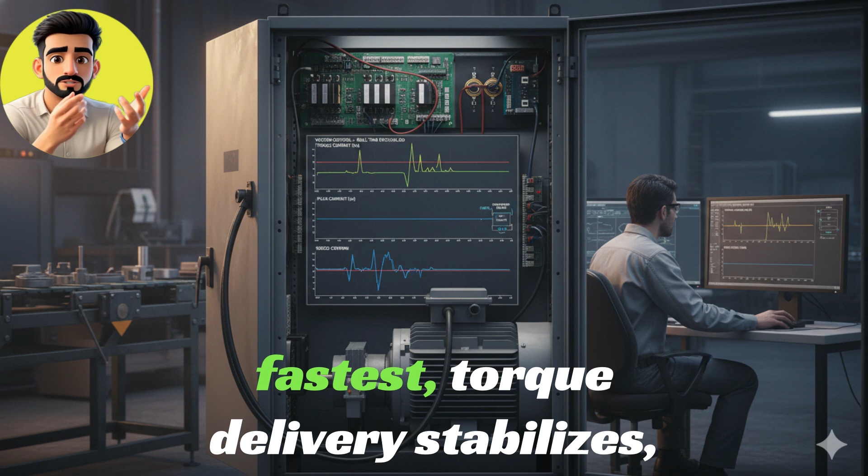When vector control and properly tuned PID work together, the system operates in a high precision mode. Speed response becomes the fastest, torque delivery stabilizes, and the overall behavior of the machine becomes professional industrial grade. The operator gets a feeling as if the machine is working thoughtfully. Smooth start, smooth stop, perfect speed control, and completely stable performance despite load disturbances.

Friends, this was part 7 of the VSD series. Today we understood the PID loop not just as a theory but as a real engineering tool. Such deep and practical explanations are rarely found on YouTube because the purpose of ElectriVerse is to give every engineer the clarity that takes their career to the next level. From today's part, you saw that tuning is not just a game of numbers, it is a process of understanding the machine's personality. When PID and vector control are properly tuned, the machine runs so smoothly, so stably, as if an experienced operator is controlling it himself.

And in the next episode, we will make a historic comparison. A comparison that industrial engineers always debate: soft starter or VSD. Which one is better? Under what conditions is a soft starter the best choice? And when does VSD become absolutely mandatory? In Part 8, you will get that clarity. The design, operation, and maintenance that truly provide value.